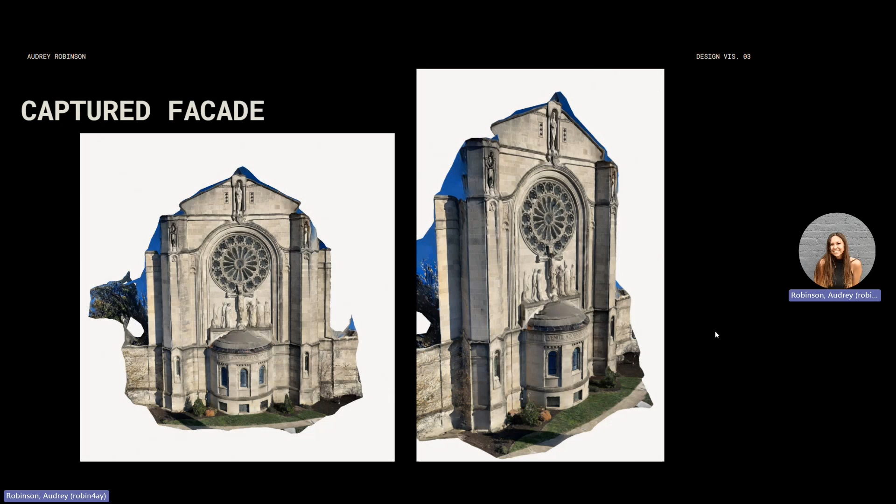It did end up filling in some areas just because I couldn't get high enough to capture the top of this little archway and those spaces I was unable to access since I was standing on the ground with my phone. But I'm really happy with the quality of this model.

And then I signed up for the free trial, and from this I attempted to create a three-sided capture of the facade just to represent the dimensionality of Polycam.

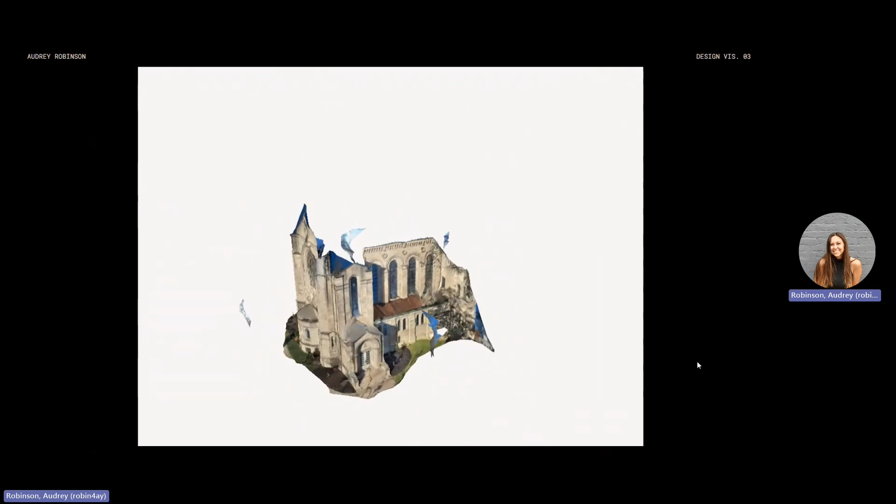Again, this was just from standing on the ground, and I think this was 320 images, so obviously I could have taken more to capture more detail, but the point is that it's really, really easy to use and you can capture almost anything to a degree just with your phone.

So after capturing the facade itself and understanding how Polycam works, I tested the tutorial that I created with my peers.

From there, I created a tutorial, which I will play now. Within that tutorial, I basically just use the software, showing students that it's really easy, it's just an app you download and you have access to all of this really cool stuff.

Hi guys! So today I'm going to be showing you how to use photogrammetry and create 3D models. So first you are going to go into your app store and search for Polycam.

It is a black and white logo, should be the first thing that pops up. It is a free app. Go ahead and open that once it's downloaded, and it takes you to the recording screen automatically.

So going back into the library page, you can see they have little tutorials and any previous projects that you've created, as well as any albums for larger scale products. Back to the 3D object.

There are two options when capturing images, auto or manual. I prefer auto just because it creates more cohesive and connected images. And you just start recording.

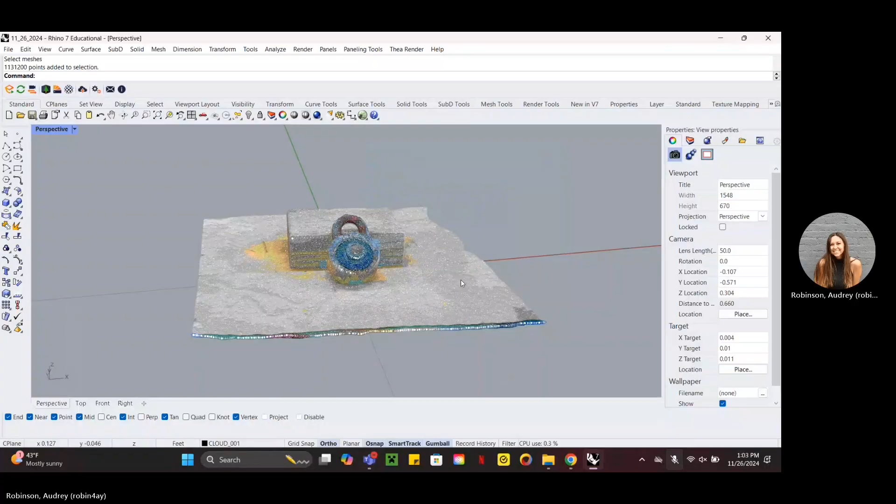But you can also export it as a 3D object to any application. Another good thing is you can click which software you're using, and it will group which file types work best with that software. So if you're using Revit, SketchUp, Rhino, Sketchfab, anything, it will automatically try to show you which file type is best. So here it is in Rhino, which is what I typically use.

You can see the object is a point cloud because I exported it as a DXF, but then re-exporting it as an OBJ for Rhino or as an STL.

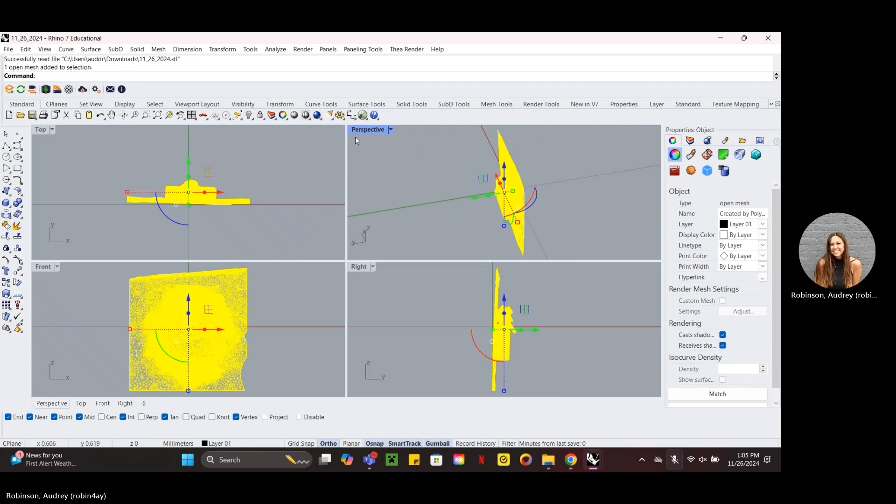Exporting it as an STL will upload it as a mesh, not a point cloud. This does not import material or object orientation, so you have to reorient your object to the correct parts and then orient your camera to be able to see everything.

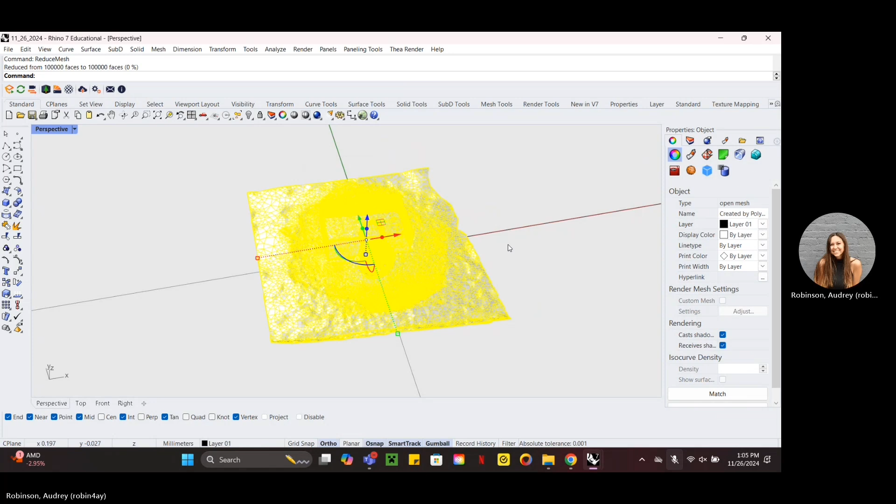So here I'm just flipping it around, and you can see those meshes instead of points, which is a little bit faster for my processor. However, it's a lower quality model. You can go ahead and reduce the mesh just to make your software run a little bit quicker.

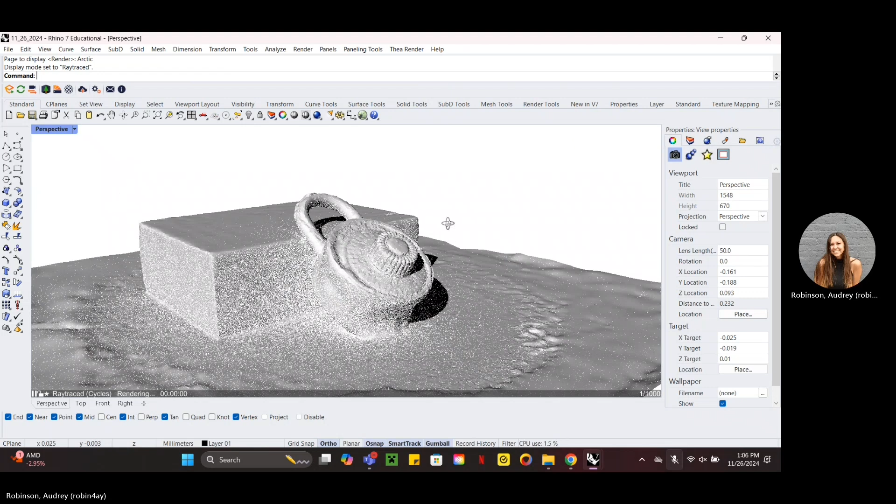Taking it into Arctic to get rid of those mesh lines, you can see that the model isn't necessarily as clean and there aren't any textures. You can try to apply textures or change your display settings to get optimized representations. Taking it into ray trace to see some of those shadows, but you still don't see any textures, which is the benefit of uploading it as a DXF and a point cloud.

Going back into the 3D model from Polycam, you can use this as a really nice visual representation of any 3D object in real life that you need to digitize, and it creates a very comprehensive 3D model. So I applied this to my research object, a facade.

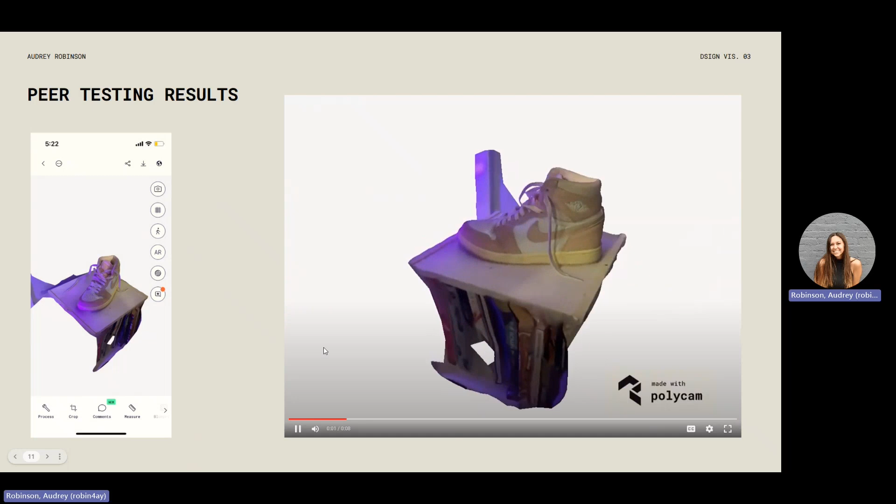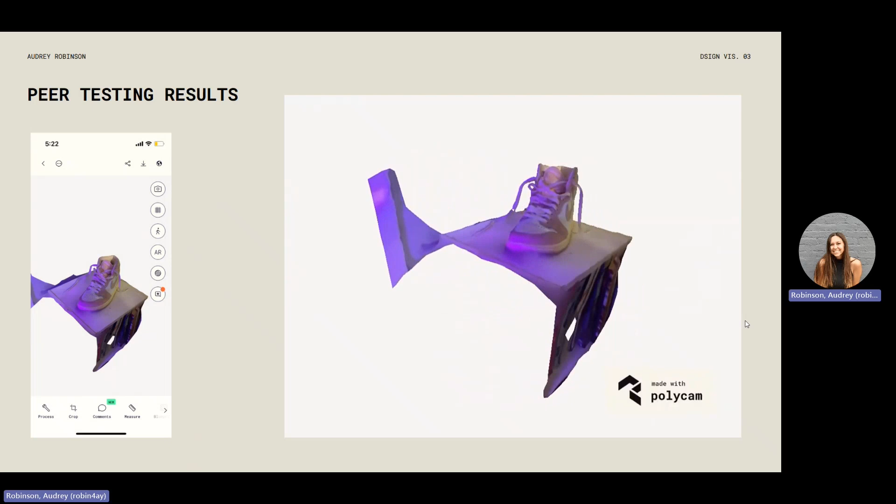I had them create a 3D mesh of any object. They chose a shoe, and here is the model of that. I think it was really successful because I didn't have any influence on them creating this. They had no idea what Polycam was, what digital heritage was, and I just gave them the tutorial, and they were able to successfully create a model. Obviously there are some issues with the model, but that's just things that come with practice.

It was really clear that they got excited about the model when they came to me after creating it. They were like, I did not know this existed, I didn't know it was so easy. And it seems really applicable in many settings. I'm focusing on digital heritage, or cultural, historical architecture, but even in interior design and all of these related fields of design, it's really interesting how cross-disciplinary the software used for digital heritage can be.

Introducing students to this software and to the accessibility of digital heritage was really interesting, and there is a need for it within the educational setting. Students are looking for this kind of accessible, quick modeling software that they didn't know existed unless they took a specific class, for example Design Visualization 3.

So that sums up my presentation, and I just wanted to recap saying that from my research, there is a need for accessible tutorials and accessible information on all of these softwares, specifically photogrammetry within the world of digital heritage, because it's a really, really important resource that students are unable to access and use due to the lack of tutorials, information, and communication. So even within this project itself, I have spread the word and increased knowledge and awareness of digital heritage.